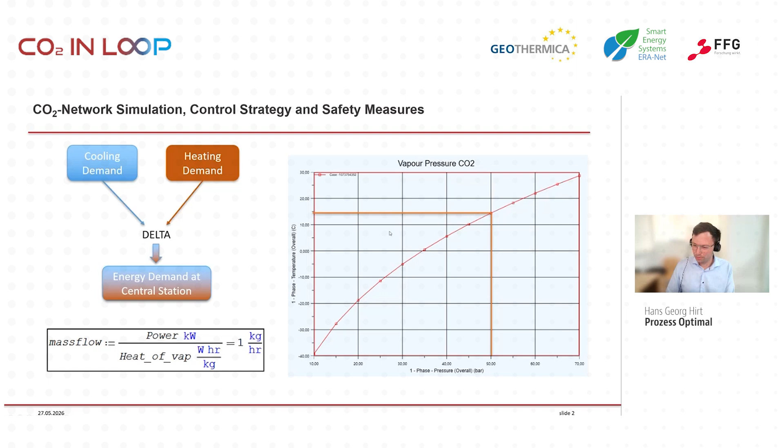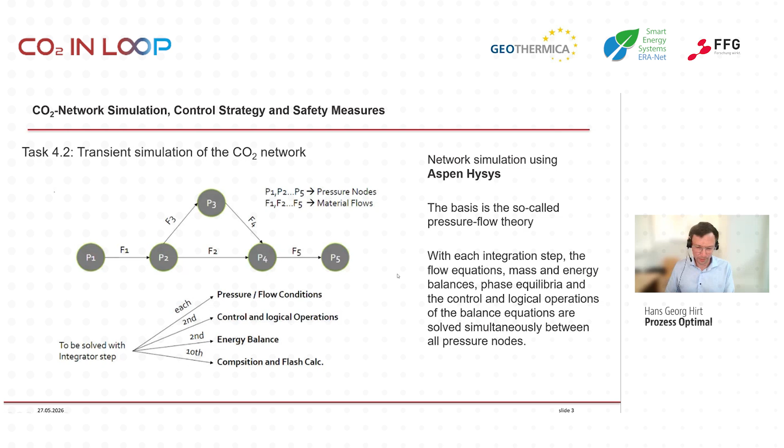So we suggested to keep about 10 degrees Celsius at the liquid line and at least 15 degrees Celsius at the vapor line to ensure enough spread to the boiling point. And simulation is a topic where we have just the model parameters. I try to explain to you this type of simulation where you solve several equations at the same time at every position of the network.

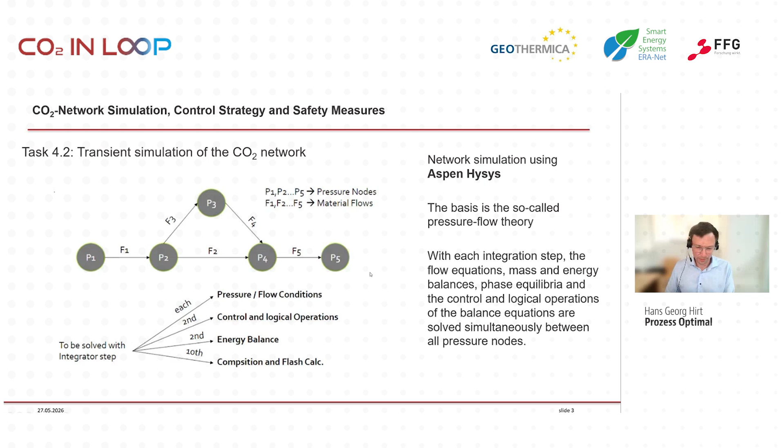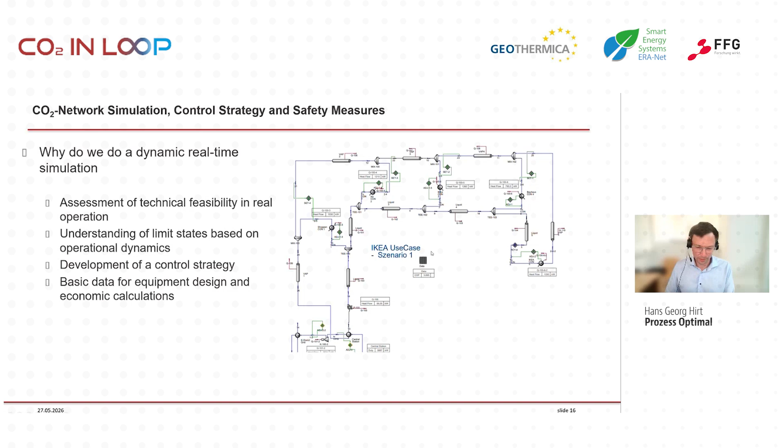And with this model we have been able not only to solve these equations for the mass flow, but also to gain information about the energies needed for our heat exchangers and also pump pressures, etc. And in this project, it was possible to make an estimation about the costs of the whole equipment needed for such a CO2 network, depending on the demands of the consumers. The simulation also made it possible to make a control of the CO2 loop network.

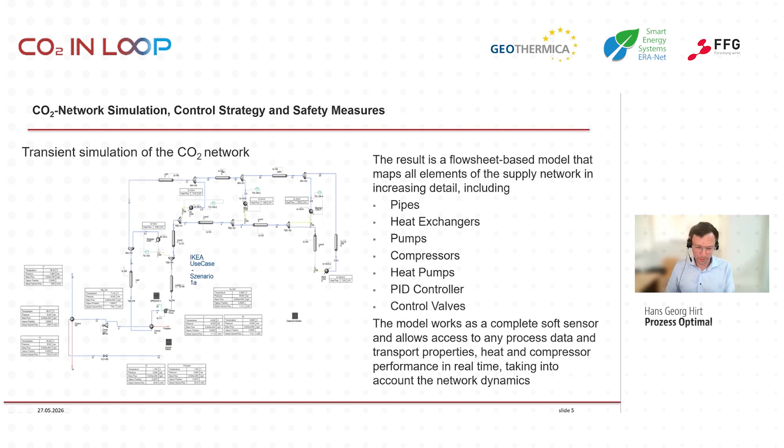And in the next step, I will show you how this user station was realized. So it's not only the simplified approach of a heat exchanger connected vapor to liquid, but it's also an approach where we can say, okay, with one user station, you can heat and cool at the same time, and you only want to pump liquid CO2.

So in the first direction, if the consumer transfer station is in heating mode, so you as consumer want to heat, you want to consume from the vapor line, you're opened and you're condensing CO2 on a heat exchanger, and on the leaving side of the heat exchanger, a control valve is opened or closed depending on the demand, giving the condensed CO2 back to the liquid line.

And in the other direction, where the heat transfer station is operating in cooling mode, you're opening a valve to the liquid line and pumping liquid CO2 to your heat exchangers, and the PID controller again controls the flow of the CO2, and superheated CO2 is added to the vapor line.

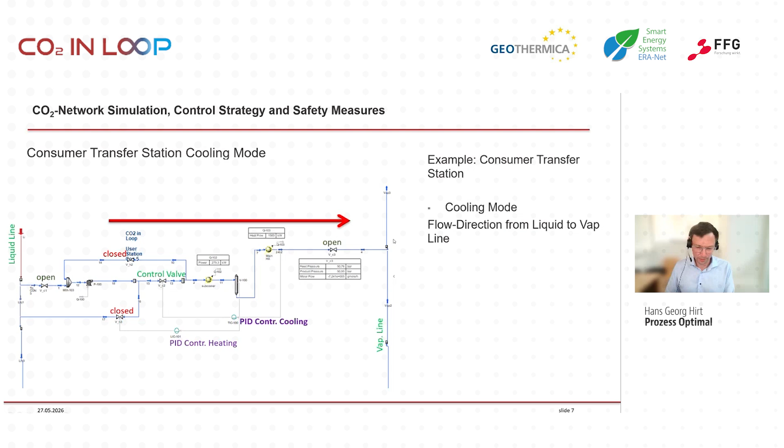What was interesting about this was that you don't have only this consumer station, but also the problem of some points where nearly no flow exists in the network. And therefore, we thought this could be a problematic phase in the operation. So we had the difficulty that it's not only a water network where you have the forward flow and return flow, but also the need to evaporate or condense the CO2 to get to the liquid or, vice versa, the vapor line.

So it was clear we have to ensure across the whole network that the flow going from one consumer to another, here the green points, is taken into account. And then if the sum of the flow going to the next consumer is too low or next to zero, we have to take into account the cooling of the liquid or vapor in the pipe.

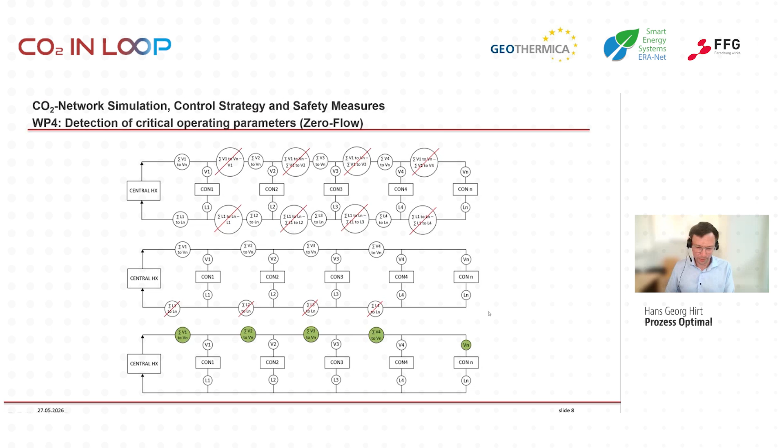To ensure this prevention of the phase change, as Robert already mentioned, it's necessary to keep distance to the boiling point of the CO2, and there are two possibilities. Even combinations are possible. The first one is a differential pressure of vapor and liquid line.

For example, the boiling point of CO2 is lying at 44 bar at 9.1 degrees Celsius, so this is the ground temperature of the CO2 network in Denmark. So if you are having a pressure above this 44 bar, you are in a defined liquid state in the liquid line. And if you are below with 43 bar, for example, you're in a defined gaseous state. And this could be a solution.

But our attempt was another one because of the fact that there are also some flows in between the consumers, and you want to ensure that you always have the right temperature at the consumer. Our approach was to superheat and subcool the CO2, so controlling the temperature of the network to ensure enough flow and duty in the network to keep it at the clear phase position.

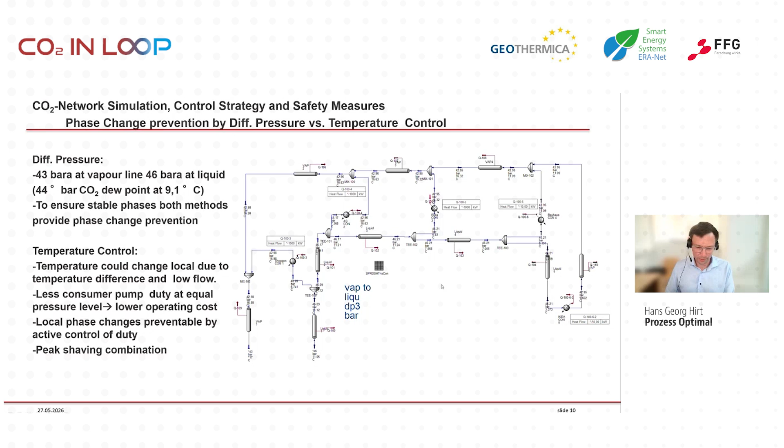So we added this phase change prevention consumer, as I said, another consumer at the end of the network. From the size, about a third of the size needed for one consumer. And we tried to ensure here the safe state by keeping the temperature above 15 degrees Celsius in the network.

And it was possible to even increase the energy efficiency with this system, because the buffer we installed for this phase change prevention could also be used for energy saving by peak shaving, and has a double usage in this format. And because it's a research project, we also wanted to be as energy efficient as possible. So we are just storing the energy in this buffer we need for these temperature switches, and we are trying to gain the energy by another heat pump.

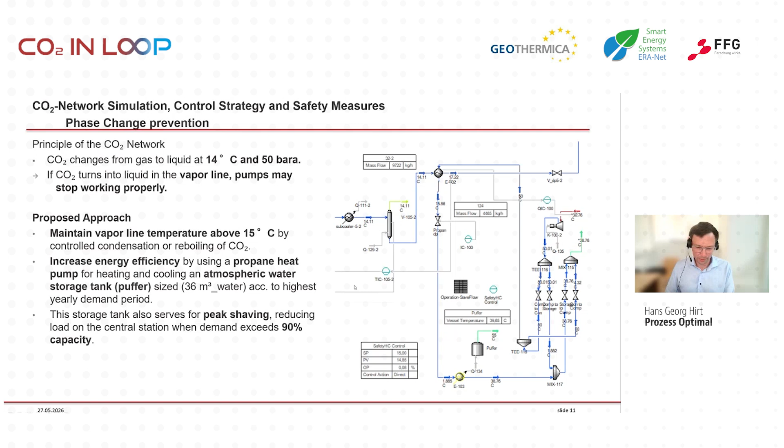Yeah, we also tried to size this buffer vessel according to the highest demand in the year, so we have enough energy reserved to keep this buffer in operation. And the buffer had a size of about 36 cubic meters, and it could be possible that the peak shaving could be even more with a bigger buffer, as you know.

But in our operation, we tried to shave about the upper 10% of our end duties. And this was possible with this nearly 40 cubic meter buffer, operating between 5 degrees Celsius and 55 degrees Celsius in this propane heat pump of the energy store.

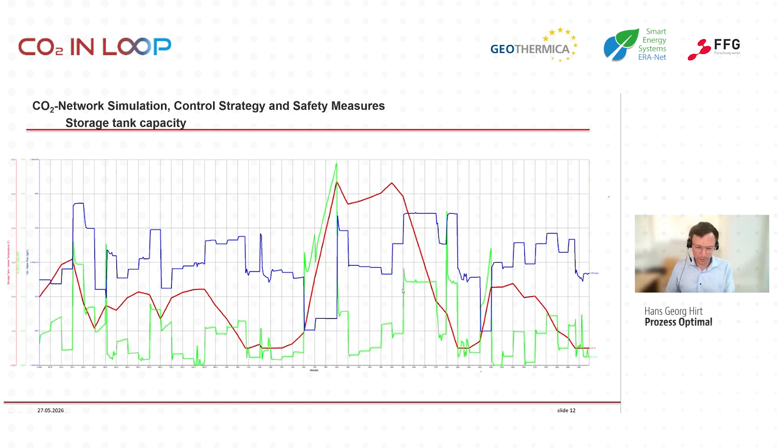So we have been provided with load profiles of the 5 consumers, and they were integrated into the simulation module, and we ran the simulation over given time periods of over 2 weeks, and also a yearly time period, just to ensure the stable running of the simulation system.